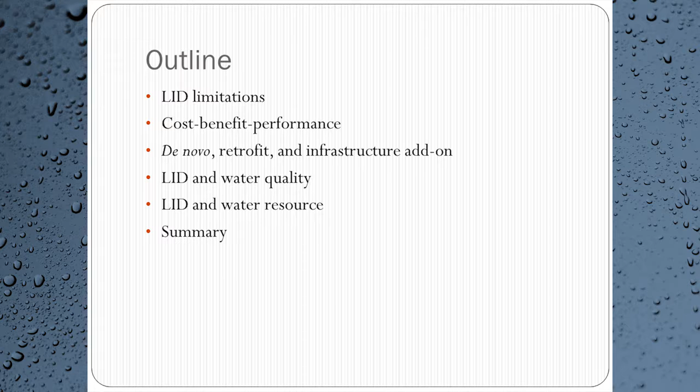I think I mentioned this in the last presentation. The message is that LID is not for everywhere because of the limitations in both natural conditions, things like topography, soil type, groundwater, or man-made issues like land use, soil and groundwater contamination, and things like that.

If we use a GIS-based approach, these slides give an example for Newport Bay watershed, which is in central Orange County. So we did a GIS layer and analyzed the natural and anthropogenic information, overlaid them, and came up with the limitations for LID implementation.

Figure H, at the center bottom of the slide, shows that if we overlay all the limitations, there are only very few places where we can actually implement LID because of the soil, land use, land ownership, or groundwater issues.

So this showed, when we actually think about LID implementation, especially for certain types of LID like infiltration, we need to consider all the facts.

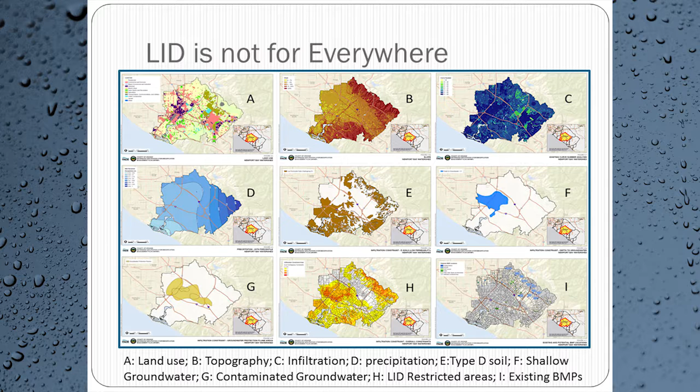This graph shows the entire Orange County, and using the same process I described before, the red dots are pretty much the area where, after all the limitations are considered, these are the places where we could implement infiltration type of LID. As you can see, very few places are actually amenable.

I think Andrea talked about private and public cost issues, land ownership issues. These red dots are pretty much public-owned parcels. Because of a lot of restrictions on where we could implement LID, liability issues, cost issues and things like that, considering all of this, very few places we could actually implement LID.

Cost, of course, is part of the deal, because if we go outside of the market factor, the cost for land acquisition is sometimes something you have to consider. You buy land to implement LID, which usually means a lot of cost.

The other cost could be, if you don't do LID, or you have some issues that could have been solved by implementing LID and you don't do it and you go out of compliance, the compliance penalty or compliance cost could play a role. So that's something to think about.

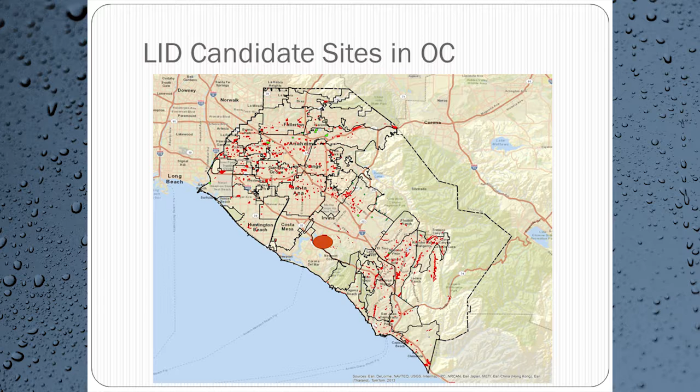The red dot I showed is actually where UCI is. I want to put that in because UCI and some other places are recently added into the Phase 2 stormwater permit. We actually invited the environmental manager for UC Irvine to our campus to share our experience and perspective on how to achieve stormwater compliance and LID. I think for UCI folks, they are actually doing pretty well. There are quite a few sites on campus, and I'm sure Stan knows some of them.

For LID, I mentioned it has many limitations, including climate. This picture shows Millennium Park in Chicago. I'm actually going to visit Chicago in August, so I'll take a note - I'm going to visit Millennium Park. I think Chicago stands out in terms of the implementation of LID, especially green roofs, and this is a good example of a green roof.

Obviously, green roofs are something that in Southern California we have considered. Even for the project right outside of my office - as I speak, there are folks outside working on an LID project - we thought about a green roof, but because of many reasons, including the precipitation pattern, temperature, and the irrigation needs, just because of the climate conditions in Southern California, it doesn't make a whole lot of sense for us to implement a green roof, because of the structural need, cost, and the need for a lot of irrigation when there is no rain, which is very rare in Southern California.

So that's one of the reasons. I'm going to talk about other reasons later on. And we also need to think about the other natural factors for green roof or other LIDs.

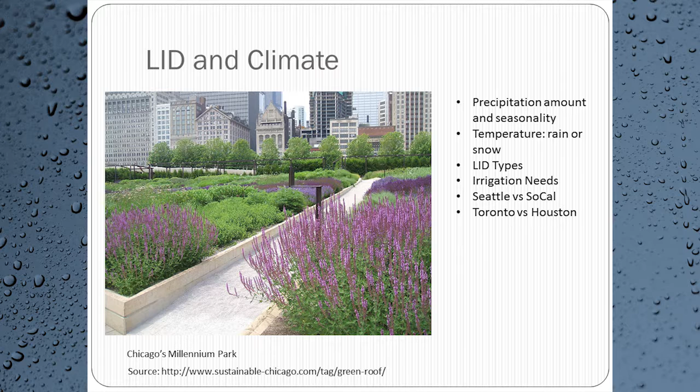causes a lot of issues for infiltration type of LIDs. So next one is just to show you the case study in Houston.

This one actually was taken a few days ago by a drone. As many of you know, they are experiencing a historic flood, and many people actually died. This is a park that is built on top of Buffalo Bayou, which runs through the city.

Interestingly, I was there last year when I was attending the LID International Conference. This location was where I took a friend of mine from China, took a picture, and you can see it was dry—the river actually was to my left, way out there. In the flood, it just overtopped the whole bayou and flooded a very large area of the city.

I think the lesson from this picture is that for Houston, because of the specific soil type, which has very poor infiltration ability, the ability to implement infiltration type of LID is very limited. That's one of the reasons why when the storm is huge, they have issues dealing with that.

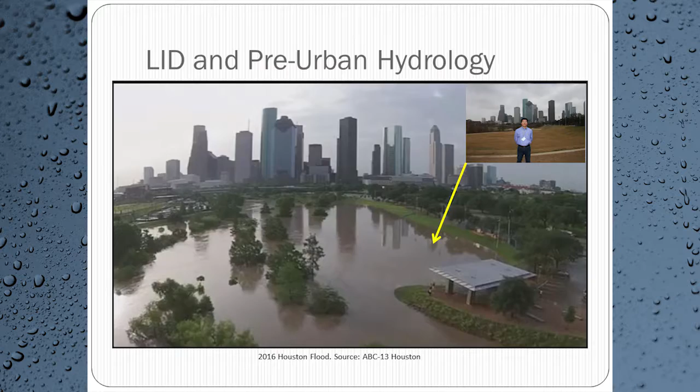Next slide shows the multiple benefits for LID. I think everybody is pretty well aware of this, so I'm not going to go into details.

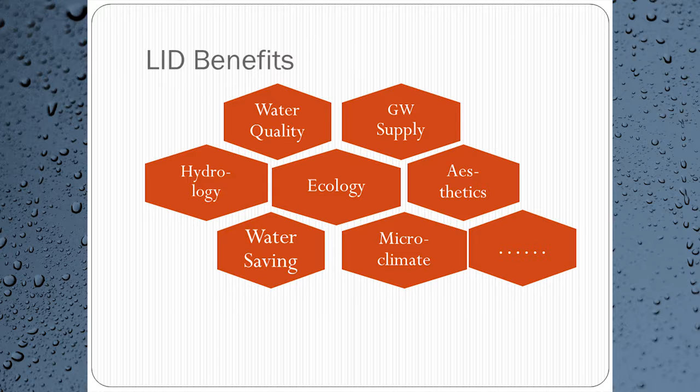The next one is just a graphic prepared by our consultants when they helped me design our campus LID project, showing different types of LID and their performance in terms of water quality improvements.

I think the data is mostly based on the international BMP database, where for different types of pollutants, the average performance was shown here, and that's actually how we came up with the 95% load reduction—because our project is going to keep 85% of the runoff from the site, and out of the 15 remaining percent of the runoff, we're going to remove about two-thirds of the pollution.

As you can see, most of the BMPs or LIDs can remove about 50 to 75% of the pollution load, and that's how I came up with 5% remaining discharge of pollutant, so 95% removal.

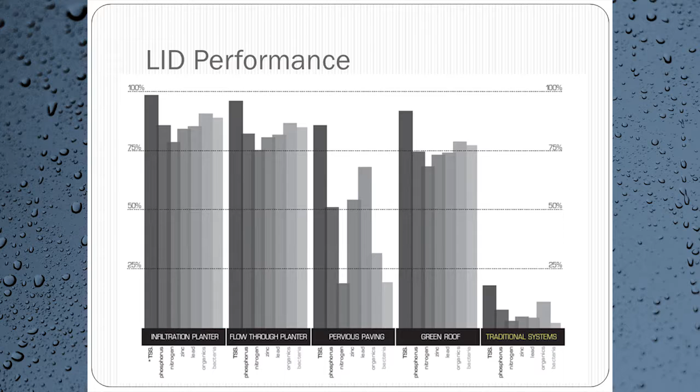So the message here is that for LID, cost is a very important consideration. Even though overall our performance cost-effectiveness is not that great, it's because we want to use our project site to be a foundation for research, public education, and demonstration.

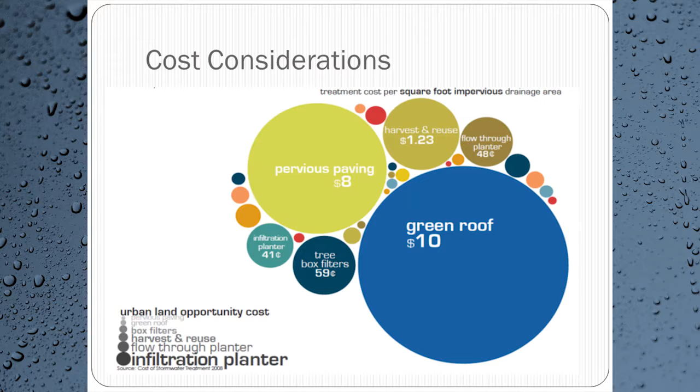Andrea and Stephanie talked about it—cost is a big concern. So next slides, I want to just mention different approaches to LID implementation.

When we talk about using LID for improving water quality or water resources, there are different options. One could be new construction—if we have a new community to build, or just one single building, either through regulation requirement or through the landowner having a conscience about environment, he or she might be interested in putting in LID.

It could be distributed for every parcel or centralized. A community could choose to build a stormwater basin or multi-benefit basin, like one of the basins in southern Orange County—I think it has a long name, I forgot it, but it's one of the multi-benefit BMPs that we built.

It could also be retrofit—just like our building, this is a retrofit LID project where we actually wanted to just refresh the parking surface. We have three parcels; the concrete was all cracked up and looked really bad.

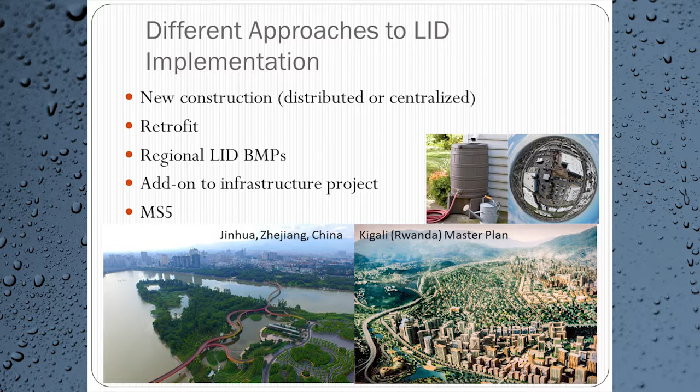The last one, I think Stan and I are actually working on this. This is an interesting idea called MS5. Here in the United States, we call the storm drain system MS4, because it's a municipal separate storm sewer system. But Stan is thinking about making it smart. So with smart, it becomes MS5, where we could use the flood control system and add some intelligent system, like computer controlled valves, to use the MS4 system to store water and link it to other systems, including LID, so that we can make better use of captured floodwater. So a lot of different new ideas.

Next slide is about LID and water quality. I think when we talk about LID implementation for people like me, who work mostly on water quality issues, this is a big deal for us. What we want to do is use LID and features like biofilters to remove pollutants from the stormwater.

Usually this is implemented through stormwater permits, and every permit has about a 5-year cycle. The thought is after a few permit cycles, we try to achieve the water quality goal usually set up by TMDL, or total maximum daily loads. The main graph looks like what is shown here, made by the City of LA for its stormwater permit. In Southern California, we have 3 major counties: Los Angeles, Orange County, and San Diego. We call the plans to achieve water quality compliance different names. For Los Angeles, it's called the Enhanced Watershed Management Plan, and for San Diego to our south, it's called the Water Quality Improvement Plan. For us, we don't actually have a name yet, but it's some kind of reasonable assurance analysis, pretty much how we can reasonably reach the target for water quality.

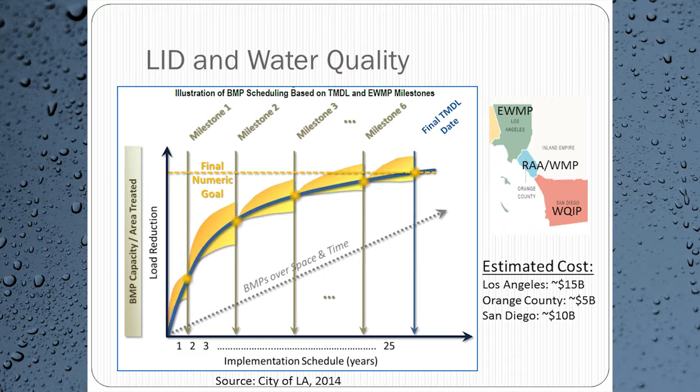Next slide is just in terms of water supply. We talked about water quality—water supply is also a big issue for Orange County. The center one is pretty much how we try to meet the drinking water demands. You can see there are all kinds of different sources, including imported water from Northern California, non-potable recycled water from the left, underneath water use efficiency—something like tiered pricing to encourage people to use water more efficiently. It could also be things like how we can improve managing the groundwater basin, including the Santa Ana River base flow.

We are talking about the upper right side of the screen. Orange County Water District actually actively infiltrates the base flow from Santa Ana River to replenish the groundwater basin. Then, for storm flows, there are dams to keep them during the storm and release it very carefully afterward so the water can infiltrate into the ground. I think in the last few years, every single drop of stormwater has been managed like that.

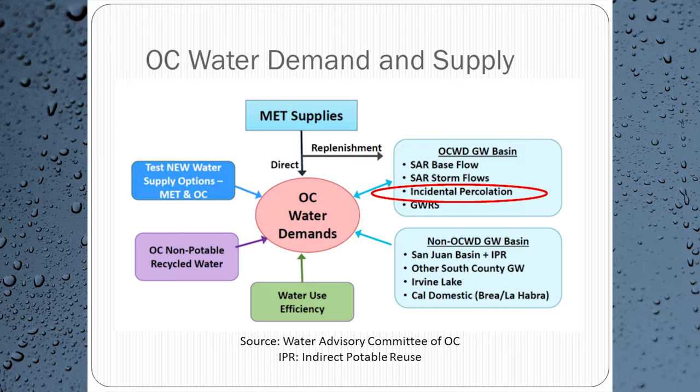Next slide. I'm trying to summarize my thoughts in terms of LID implementation. As I mentioned, LID implementation is subject to many constraints - could be natural, ownership, cost, or regulations. It also has many benefits, and we try to leverage and maximize it. We could do this through a holistic watershed approach.

I didn't mention that for all the different counties, their plans are more or less based on models. So we try to model the implementation at different places and see how the watershed responds.

Of course, we need to be adaptive because LID is still a growing science. We need to feel our way through implementing LID at a wider scale based on the lessons we've learned.

We also probably want to integrate LID in infrastructure planning, because infrastructure now for the built environment is a huge elephant in the room. It's very hard to use LID implementation to impact infrastructure, because I think it's much easier to incorporate LID elements in infrastructure planning and implementation, so that the impact from new development could be minimized, and new infrastructure can mitigate the impact from existing infrastructure. So there's a lot of planning to do, and this is our thoughts when we work with the folks from San Diego.

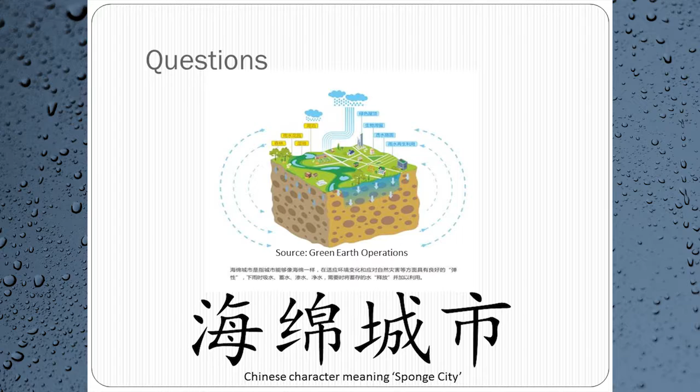Maybe this is a question for both you, Jian, and Stephanie, about maintenance. I think both of your perspectives are maybe more focused on government projects and maintenance of larger scale installations. I'm just wondering what the thought is about maintenance of distributed systems at the allotment or household scales. Wow, I think that's a question that probably Scott can provide some feedback on.

I think we just had a very good example at the City of LA, Los Angeles. I think we all heard about the project for Elmer Avenue. Right now they are experiencing some operations and maintenance issues, because I think the initial understanding was that the homeowner or homeowner associations were responsible for maintenance, but it fell through. If you go to Elmer Avenue right now, it's not in a very good condition. So in terms of operations and maintenance for private land or private parcels, I don't know - there has to be an agreement put in place before the LID is put in the ground. Otherwise, without proper maintenance, it's almost like a waste of money.

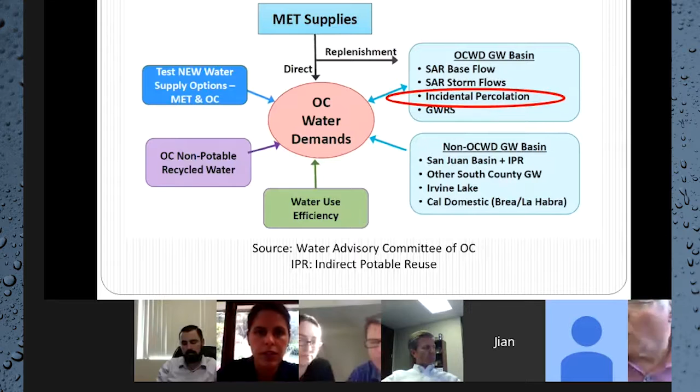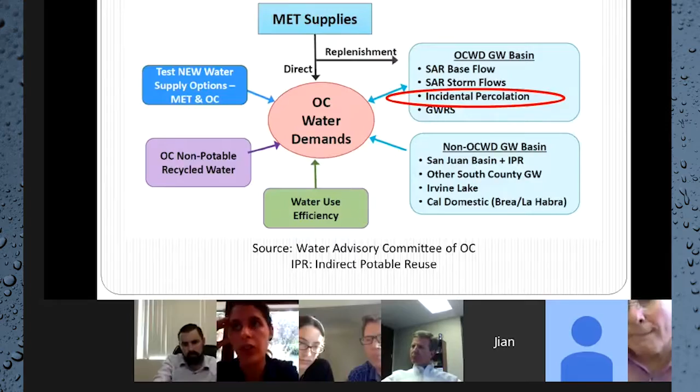Okay, thank you. Stephanie, did you want to comment at all on the oversight working group? Yeah, so these were put in place a year or so ago to respond to various issues. At the technical level, I've talked about some of the mistakes and lessons learned that we were able to learn, and we used this group to disseminate these lessons learned.

It's a very practical level, but the steering committee is what we've used as a conduit to continue the discussion, which required a high level of decision making, such as this maintenance issue, which was known by all but was not able to be addressed if the people able to make the decision were not involved. So that worked out well to continue leading the discussion and keep the maintenance issue on the agenda.

What it is at the moment is purely internal, and what we'd like to see, because of the remaining challenges we have in terms of funding cycles, is to potentially use some of the members of the steering committee to go outside and discuss with water authorities. So that's the next conversation, but using the same group, I guess. Excellent, thank you very much.